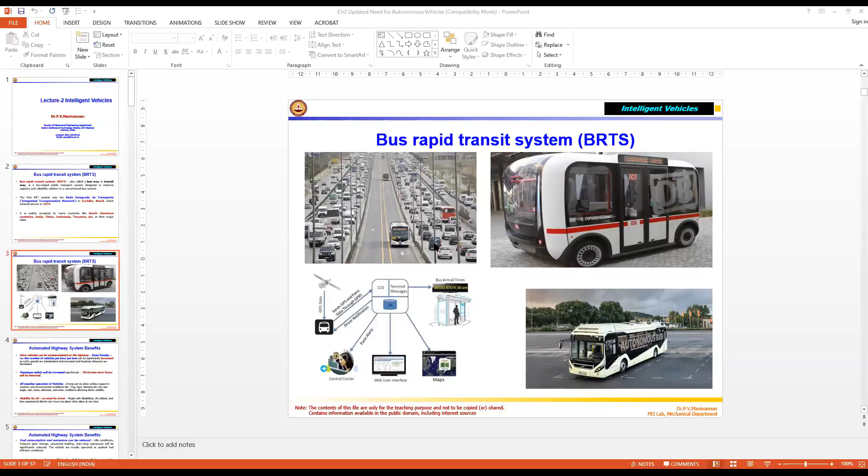Okay, today we will be talking a little more about the evolution of the autonomous vehicle, how it started.

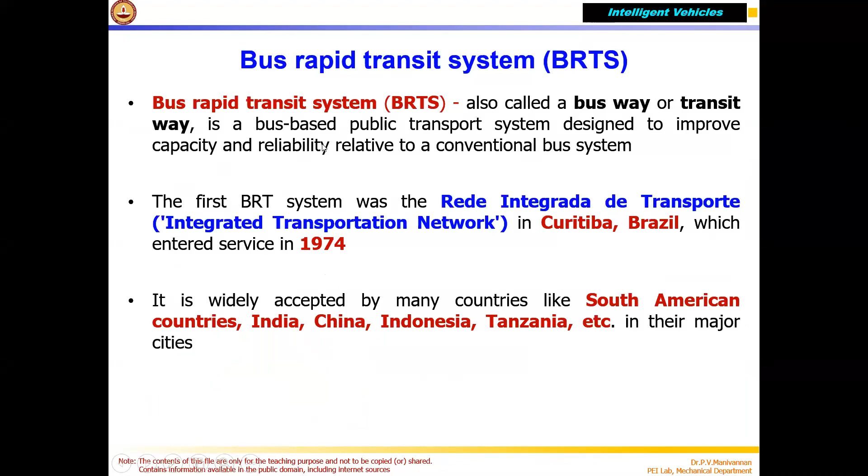Previously I talked about the bus rapid transit system (BRTS), in which basically what you are trying to do is have, inside the city, this system. I will show the figure. You can see here, this is the bus rapid transit system.

As I told you, this is the automated highway system (AHS), which started in the 1970s and was demonstrated in 1996-97 by Berkeley University and other companies around the world, where you need a special road with some sort of magnet buried underneath, and the vehicle should have sensors. It's very complex, and you need additional roads because the special road is only for this kind of autonomous vehicle without a driver.

It will drive based on sensors which give the lane marking, all those things. But building the road itself is very expensive, correct?

So then they thought, okay, we don't build new roads, but use the existing road, because most of the roads on highways have 4 lanes, 3 lanes minimum, for upcoming traffic and incoming traffic, correct? So you have minimum 3 lanes.

Out of that, can we use 1 lane for this kind of special purpose? There is no need to build a special additional road, acquiring land, all those things. For example, here you can see there are 3 lanes on one side, and another 3 lanes on the other side. So out of that, 1 lane will be dedicated for this special bus, a special vehicle.

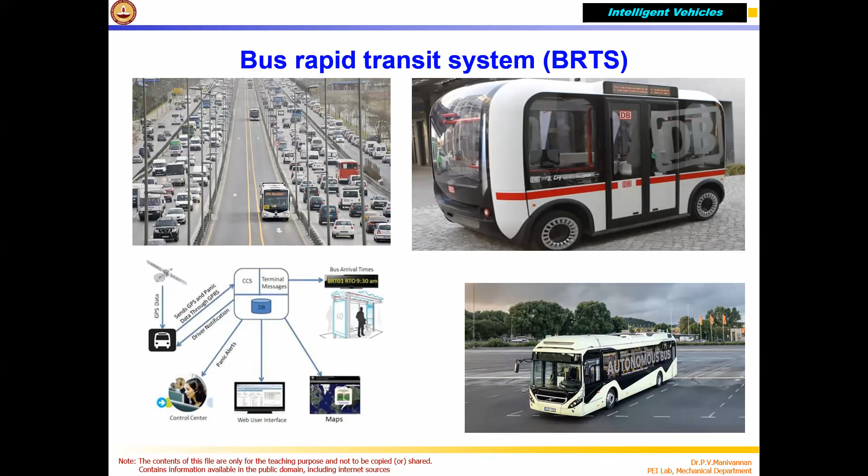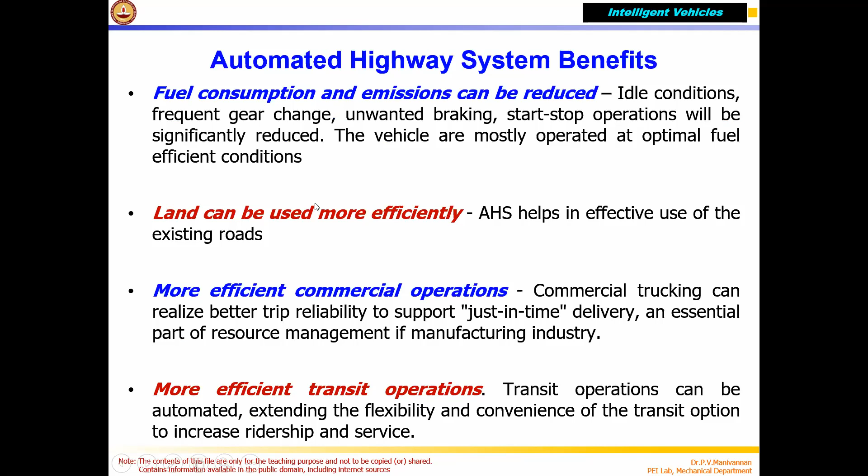Because of this, you cannot have the automated highway system, where you build a special road - you need two things: the road itself with sensors and road monitoring cameras buried under the road during construction, and a special road apart from the existing road, since existing roads are already available for this one. That is the problem - not possible, and very expensive. Even though we saw some advantages in the automated system with platooning, vehicles controlled, lane following, all those things - they have this kind of drawback also. So then what is the best solution?

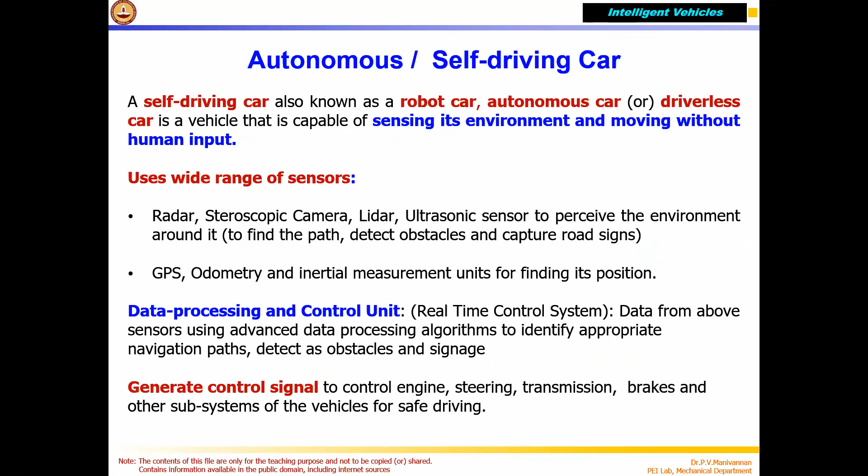So they dropped it, as I told you, the PATH program, and similarly in other places also they did the similar thing. Europe, Japan, everywhere, correct? Building special roads, universities and automobile companies worked on it, but it didn't work. So they dropped it. They demonstrated the PATH program in 1997. I showed you the photographs, right? But they stopped it because of land acquisition issues. This is the main drawback.

These three are major challenges in current areas: greenhouse gases, global warming, all those things, and acquiring land, all those things. These three issues - requiring additional land and social environmental issues - have higher weightage compared to all the 8 benefits I showed, right? So they dropped it.

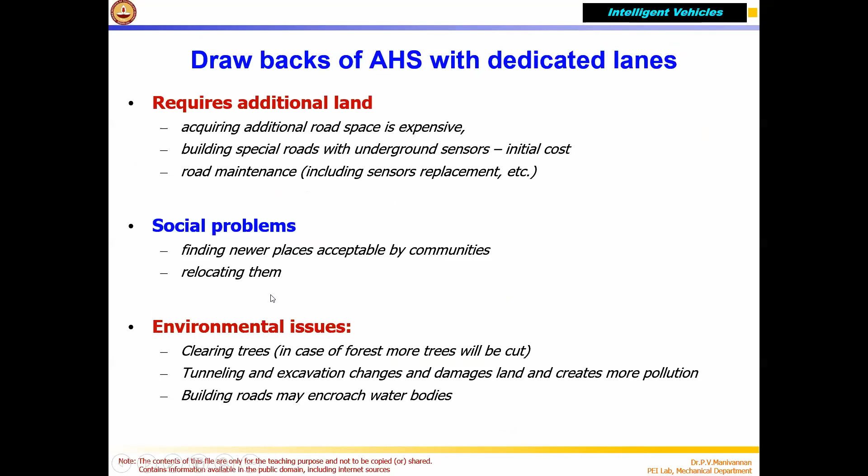So then what to do? We want to reduce accidents, we want to reduce travel time. We want to see that materials are transported just in time, with less fuel consumption, with smooth traffic, no accidents, no person getting killed in accidents, correct? Medical expenses - you may lose limbs, all those things. They say that it's around $500 billion, correct?

Road accidents - the cost of road accidents in terms of medical expenses, lifelong support, somebody loses a hand in a road accident, correct? You go to court, correct? They give compensation, correct? So you cannot drive, you cannot do work, you cannot go to office, because all those things will be considered when the court gives compensation, correct? Through an insurance company or something. So then the vehicle gets damaged, you have to buy a new vehicle, correct? Pollution happens when a vehicle burns or oil spills, diesel spills into the lake or on the air surface nearby.

So they say that the damages caused by accidents due to human error is around $500 billion currently - I'm talking worldwide. With the number of vehicles around the world, it could reach $1 trillion also, correct? So there is a huge number, correct? So you should avoid it, we want to reduce it. That means we all want to remove the human driver from the driving seat and put a computer which will drive autonomously. That's why this concept came into history.